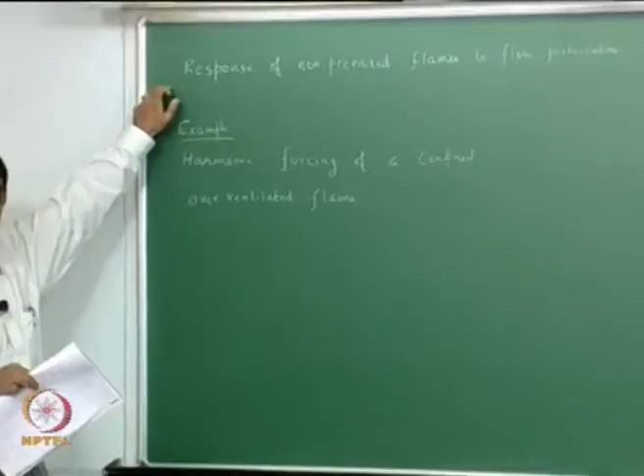Good morning everybody. We will study today the response of non-premix flame to flow perturbations. So we have done some study of how we can calculate the response of premix flames to flow perturbation. And do you remember how we did this?

G equation. So what does G equation do? It tracks the flame front, and then we solve for the flame front. G equation, what is G actually? It is some kind of variable, but it really has meaning only at the flame surface. And now we want to see whether a similar approach can be done for diffusion flames.

So we will specifically follow the approach of Balasubramanian and Sujith, and these references are given here. So first one is 'Nonlinear response of diffusion flames to uniform velocity disturbances', Combustion Science and Technology, 2008, volume 180, page 418 to 436. Then the second one is a paper from Journal of Fluid Mechanics on diffusion flames. There are two more from our colleagues, Chakravarthy's group, and that's also about non-premix flame.

Now compared to premix flame, which has a very large body of literature associated with its response, these are the only papers that you will find about diffusion flames, although nowadays with the reduction of NOx in aero engines, which still uses non-premix flames, instability in diffusion flames is becoming a subject of interest again. There is a textbook available by T.C. Lieuwen called Unsteady Combustor Physics, Cambridge University Press. Chapter 11 of this book has a consolidated treatment based on those papers which I mentioned.

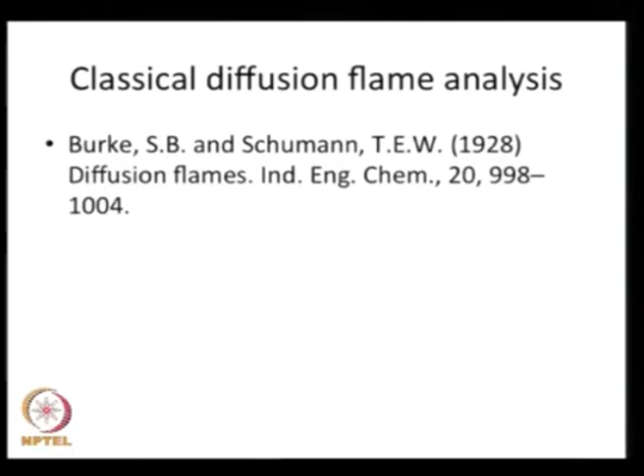Now, this is a very recent textbook. So you must have all heard about classical diffusion flames. This is the pioneering work by Burke and Schumann, which is why these flames are called Burke-Schumann flames. This is in 1928. So we will follow their approach, and now we are specifically interested in looking at the unsteady problem. Burke-Schumann studied the steady problem. Now we are having flow, and the flame can oscillate and wrinkle and so on. So those are the phenomena which are very similar to those you would see in premix flames, but there are some differences. So let us take a look at the geometry.

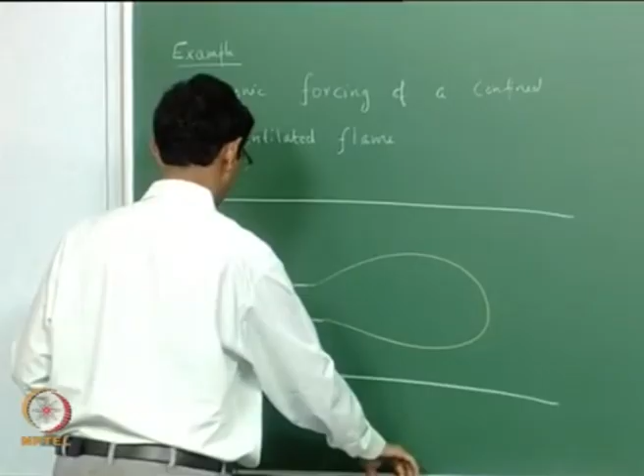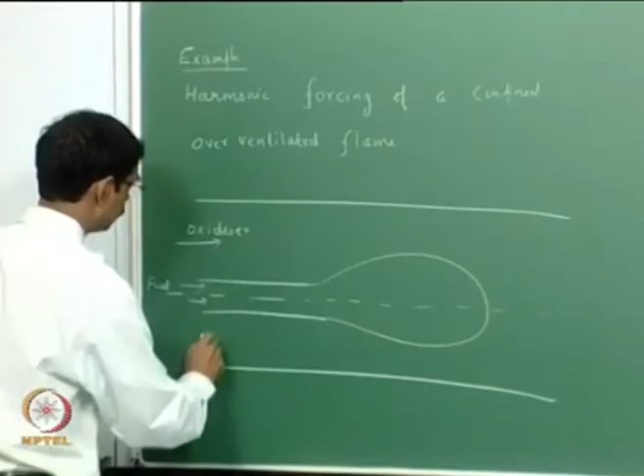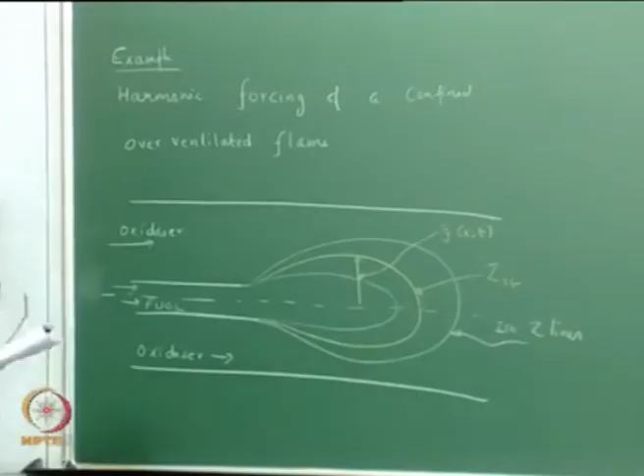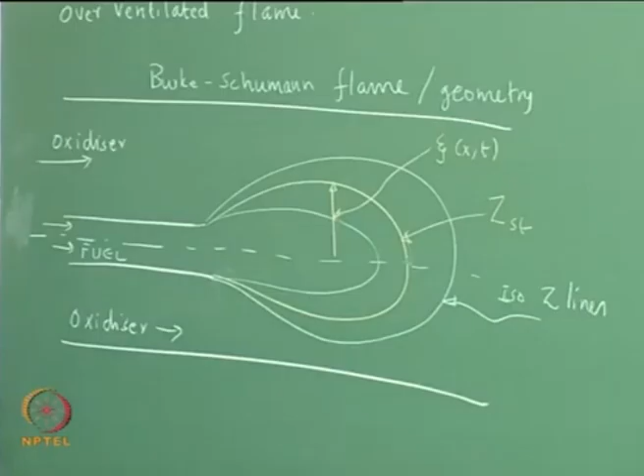This would be an over-ventilated flame, and this is the center line. Fuel. So this would be the classical Burke-Schumann configuration or geometry. So you have fuel coming through a slot, and we are considering 2 dimensional here. You can work out that for axisymmetric also, 2 dimension is simpler, and you have fuel coming inside, oxidizer coming outside.

You can work out for the opposite also, but this is the classical configuration, and there will be a flame here, which is the diffusion flame, and this is usually -- of course you can also have other flame configurations where the flame is coming and attaching on the walls and so on. So this is over ventilated. We can have under ventilated flames also, then it will go on that way.

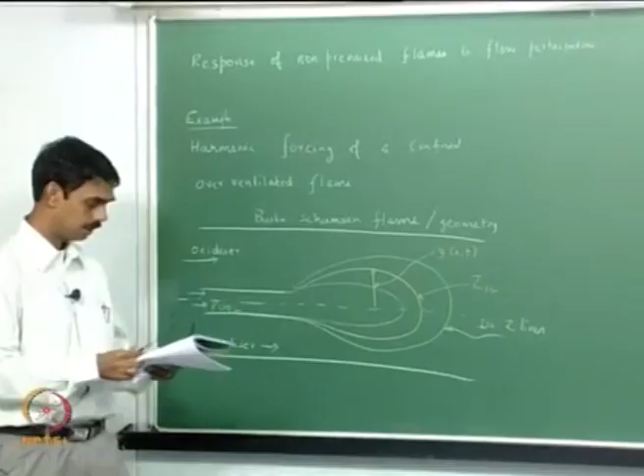So how do you analyze this problem typically? So we do this in the framework of -- what is the formulation we use? Anybody studying combustion here? Shvab-Zeldovich formulation. So what do you get in the end out of Shvab-Zeldovich formulation? Do we know this, or should I do it?

I think I will do it. So let us say we have -- of course we can actually solve both in the case of premix flame and in diffusion flame. We can solve the conservation of species equation, mass, momentum, energy, everything, and we can solve the full flow field, and we can get the reaction rate out of it. But why did we use the G equation approach? Because it was very simple. Okay, so the same way we will try to get a simple partial differential equation which we can solve to get the problem. You can of course do more complicated analysis, but this is the simplest possible way to do it, and where some analytical solutions are possible.

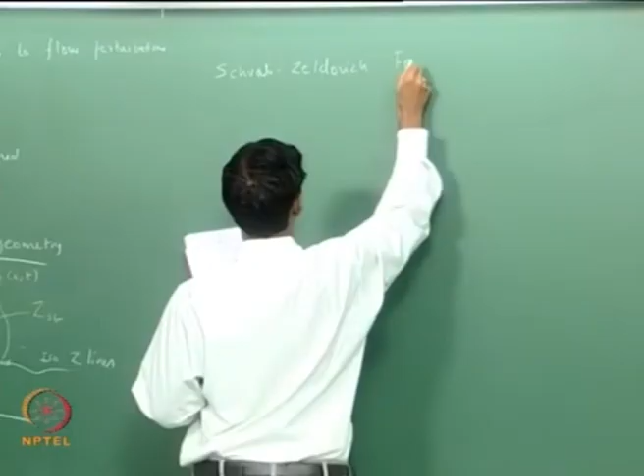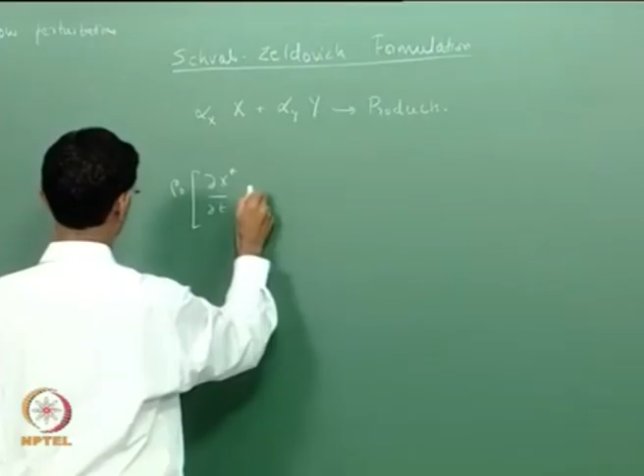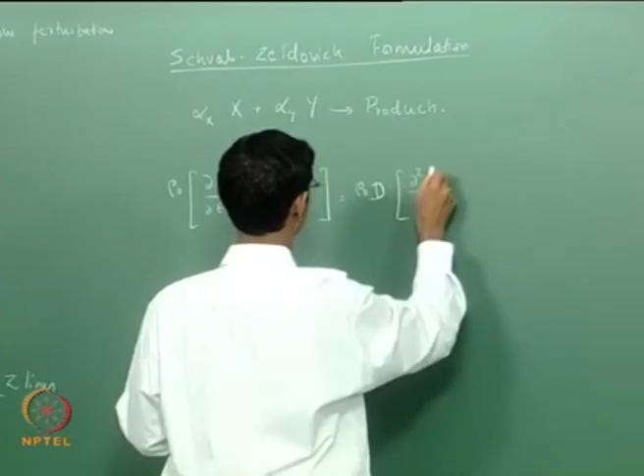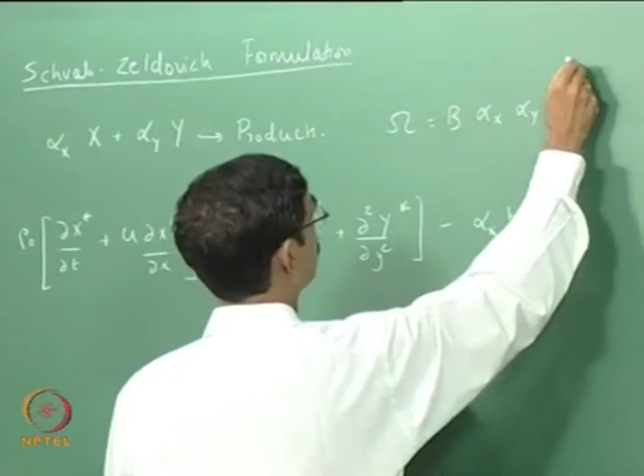So let us say we have some kind of reaction, product. So we will write the species equation for x and y. Star would mean dimensional, and without star will be non-dimensional. D is diffusivity. Omega is the reaction rate, and Wx is the molecular weight of x. Omega can be written as B, alpha_x, alpha_y, e power (-E/RT). So similarly -- if there is any mistake, please point out -- we can write the equation for y also.

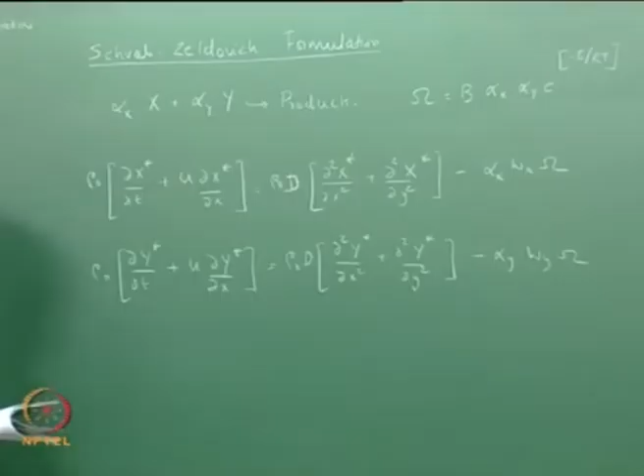So we can see hints of the advection diffusion equation here, which is a very famous equation and solved, but we have some unnecessary term which we cannot handle. So now we have to get rid of it. How do we do this? The way to do it is we should divide this alpha x wx down, and here also alpha y wy, and then you will have omega, and if you subtract, then omega will go away. So that is the key.

So if we can define our new variables, scaled variables, and we define z as x minus y, that there is a difference between the scaled mass fractions. So z is called the Schvab-Zeldovich variable.

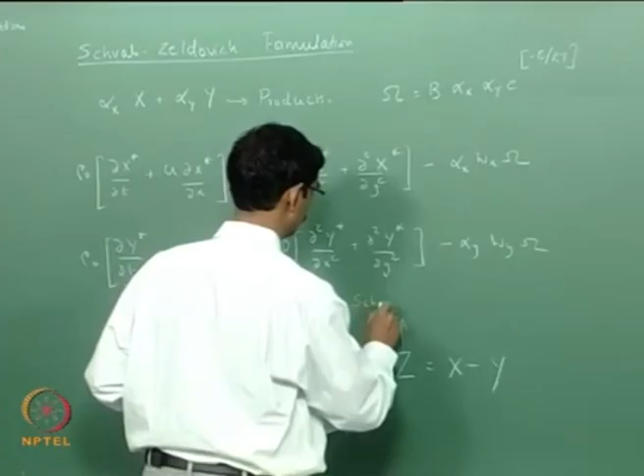So if you redo this, you get... so I subtract this from this, so I will get x minus y is z, and we write the equation in terms of this. Plus, yeah, thank you. So if I have this...

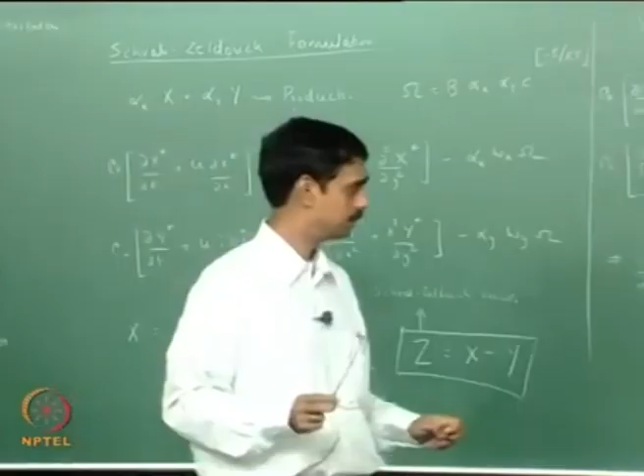So this is the advection diffusion equation. If you compare this equation to the G equation, there we had... so the left hand side of the equations are quite similar, but on the right hand side we have SL times del G over there, but here we actually have a diffusion operator. So that's the difference. So there is some similarity, but there is some difference.

The other similarity is that we are writing it in terms of one variable, but the difference is that Z is a physically meaningful variable everywhere in the field, and you have to solve for it all together, whereas G is just defined as having one sign on one side of the flame, another sign on the other side of the flame, and at G equal to 0 there is a flame. So we can actually say y minus psi is G, and so at G equal to 0, y equals psi, and write equations directly for the flame surface in a premixed flame, right.

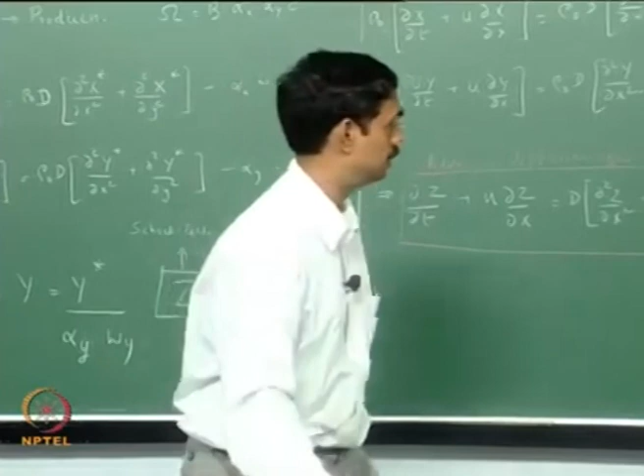That is what we did. So we said that... and then we put this equal to 0 and then directly write an equation for the displacement variable.

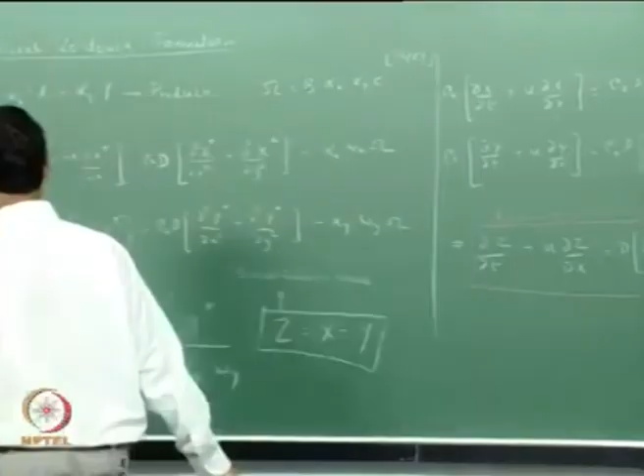So we can't do that here because Z, the Schvab-Zeldovich variable, is a physical variable everywhere and we have to solve for it everywhere, and then we can find the flame surface. How do we find the flame surface? The assumption is that the flame stands at the stoichiometric surface. So we have to find what is the Z stoichiometric, Z corresponding to stoichiometry, which is this scaled x star, so this x minus y corresponding to stoichiometry, and that would be the flame surface. So from that we can get the flame surface and then we can track the flame movement.

I hope this is clear. So there is some strong parallel, but there are also some strong differences between diffusion flames and premixed flames. Even in the results, in terms of the transfer function, we will see some strong parallels and some differences. Now we will proceed to solve for it.

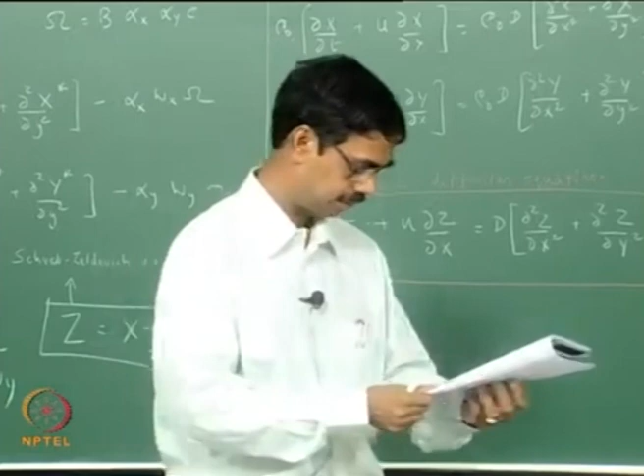So we need to apply boundary conditions, without which we cannot solve any problem. Let us examine what are the boundary conditions here. So at the inlet there is fuel, there is oxidizer. In reality, the oxidizer can diffuse and the products can actually diffuse into the fuel stream. Similarly, fuel can diffuse into the oxidizer.

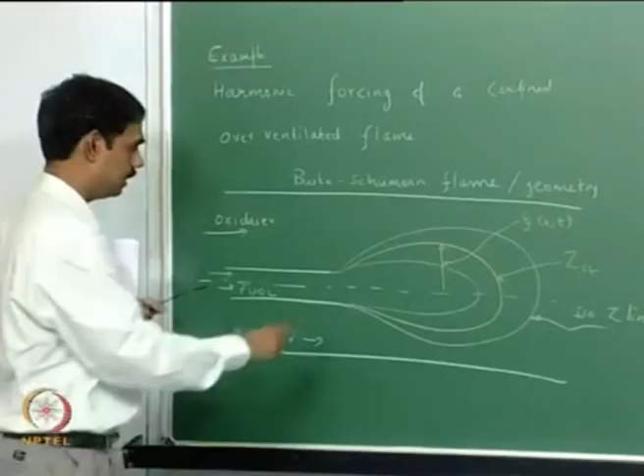So we will ignore those effects and we say that at the inlet plane, in this location we have fuel, so we will have no oxidizer, and in this location we have only oxidizer at the inlet plane. That is the way we are going to enforce the boundary conditions.

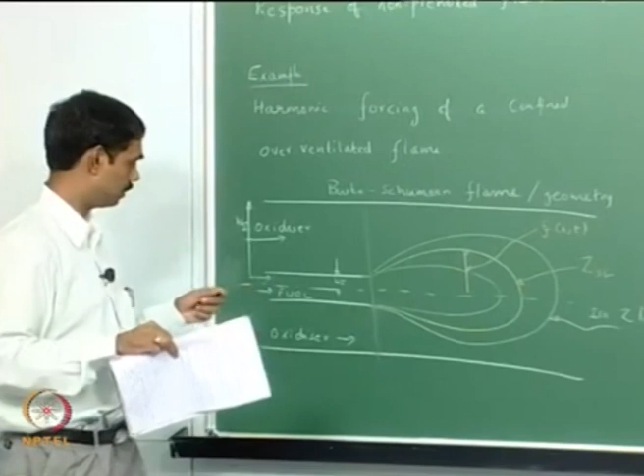Just need one more notation. I am following the symbols from the textbook by Tim Lieuwen on combustion dynamics. So this half width is W1, and this half width of the outer tube is W2.

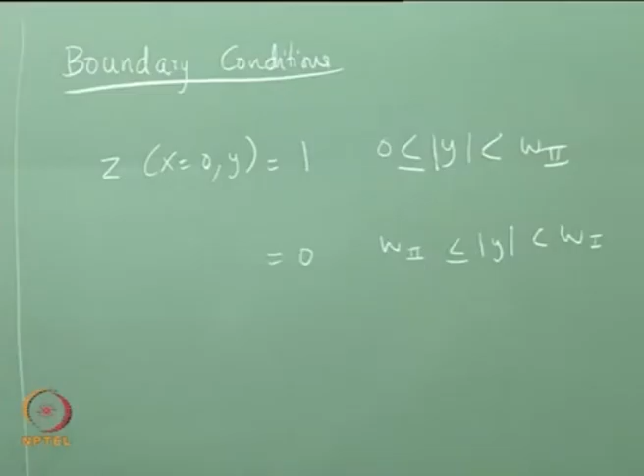So this basically means that in the oxidizer tube we have oxidizer, and in the fuel tube we have fuel, that is all. And enforcing this boundary condition also enables us to obtain an analytical solution, as opposed to if you enforce the flux boundary condition, where you would have difficulty getting an analytical solution.

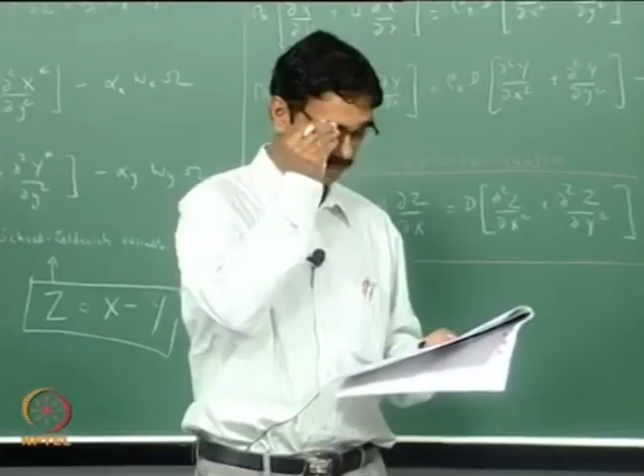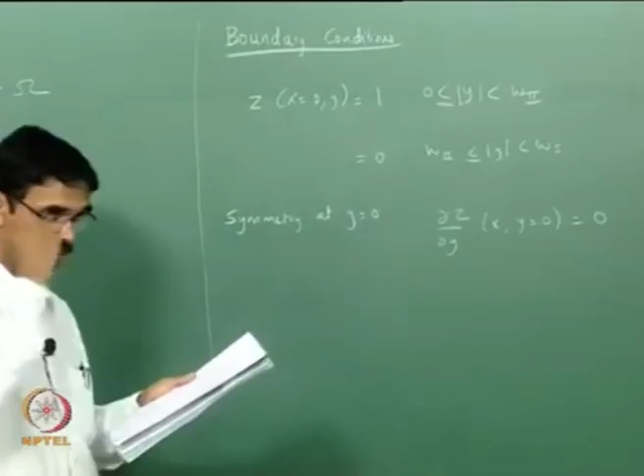So in reality there is axial diffusion of fuel into the oxidizer and vice versa, axial diffusion of oxidizer into the fuel. So the solution must be obtained over a larger domain that includes the supply lines of fuel and oxidizer. Let us correct the figure, let us call this bigger outer tube W1 and this is W2. So this boundary condition implicitly neglects the axial diffusion at x equal to 0, and we can assume symmetry boundary condition at the centerline, right, and no diffusion should happen through the walls because you have a rigid wall.

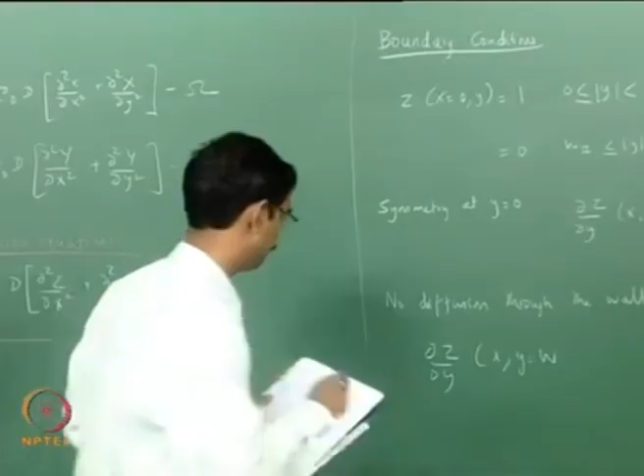And as x tends to infinity, Z must attain a finite value finally.

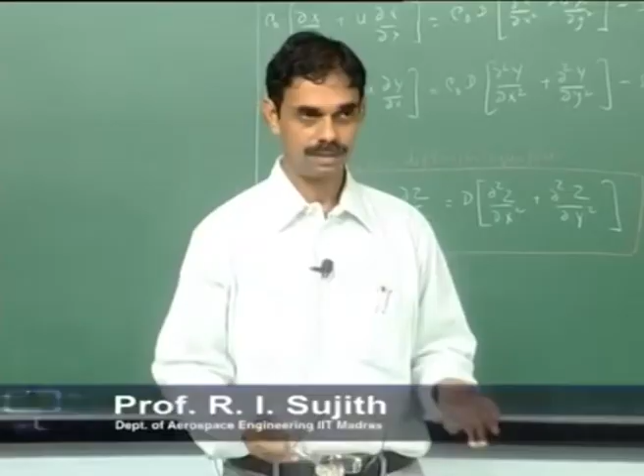We will derive a solution in the limit of small perturbations, that is, we expand everything as some zeroth order plus first order, or a base flow plus perturbation, and then we can get the solution. In fact, you do not need to do this because our equation is linear, provided u is an input, and you can see it is a linear equation. So we do not need to do it, but it is very convenient and will enable us to work out an analytical solution. So we will do that.

So any parameter, I am following Lieuwen's notation, which is a function of x and t, can be written as some base flow plus perturbation.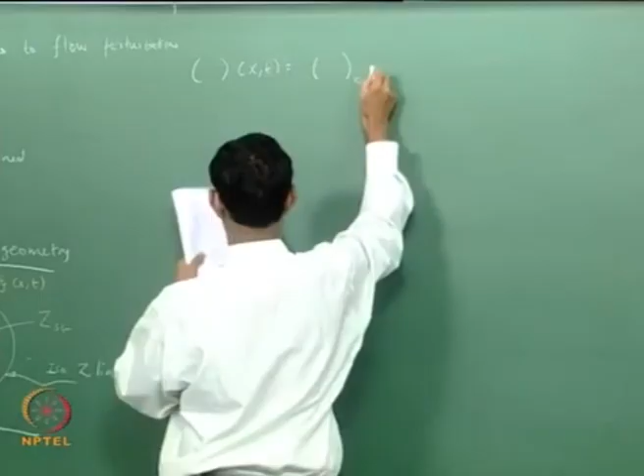With this approach we will be able to derive an explicit analytical expression for the flame surface, and this will be very nice in looking at the controlling features of the flame dynamics. So first we will study the problem in the absence of forcing, so that we can get the steady solution, and then we will look at the problem with forcing.

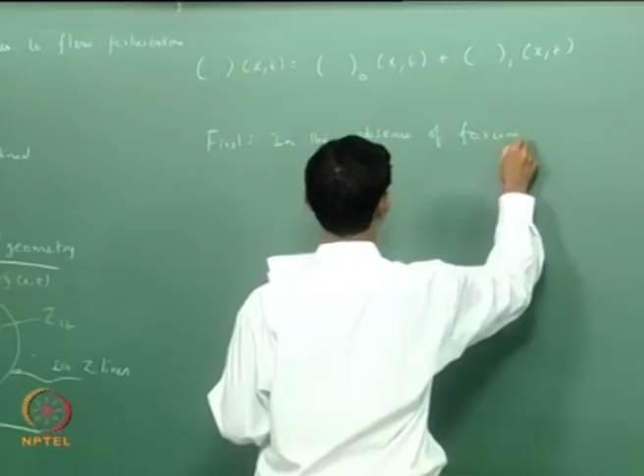So in our previous notation this would be Z bar and U bar, but I am just following the Lieuwen book here, so that you can follow it also.

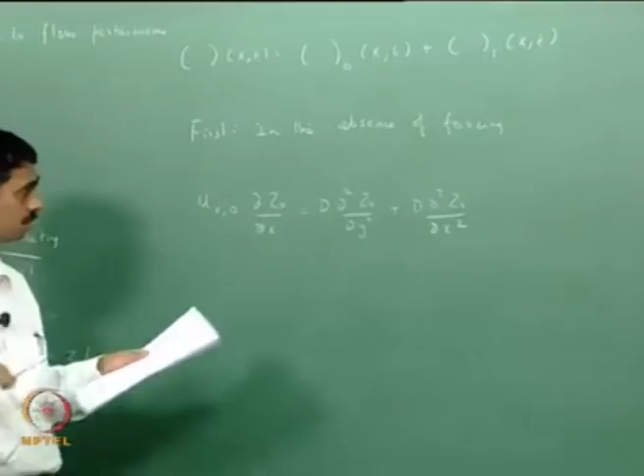So this can be solved with separation of variables. I can work it out next class, but I just want to write the solution here.

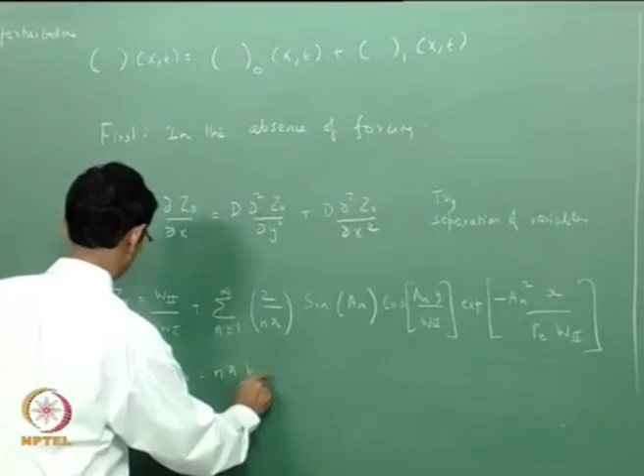So just try if you would get this. Actually, you should get some more complicated expression here, but then if you take Peclet number tending to very large, then it should reduce to this expression. So I will just let you work this out, bring it next class, and then we will see what you got and what I have.

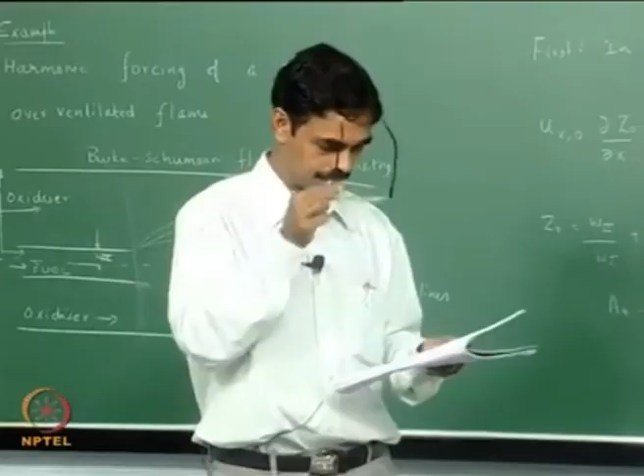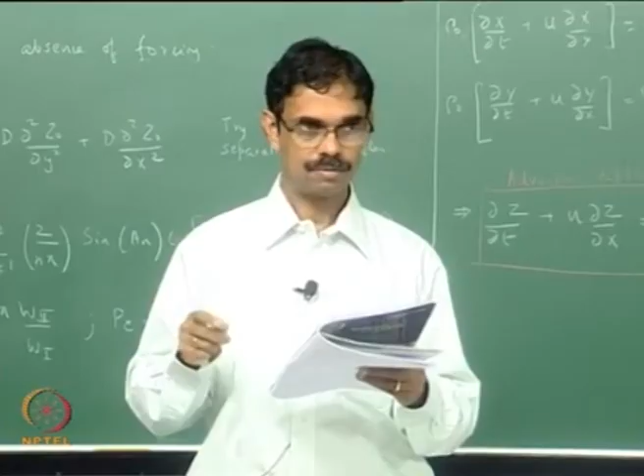Now this quantity, Peclet number, maybe in this class we are introducing for the first time, so it needs some explanation. Peclet number physically corresponds to, of course all numbers correspond to ratio of time scales or length scales or something like that. Here it corresponds to the relative time scale, ratio of the relative time scales for the two phenomena, convection and diffusion. So we want to transport mass over a distance W2, that is this, and what are the time scales involved.

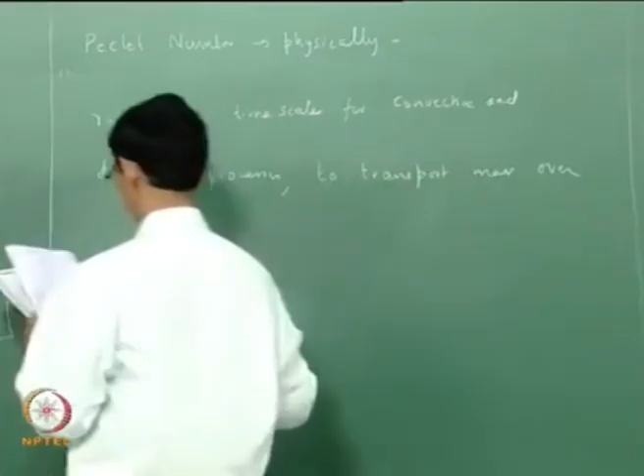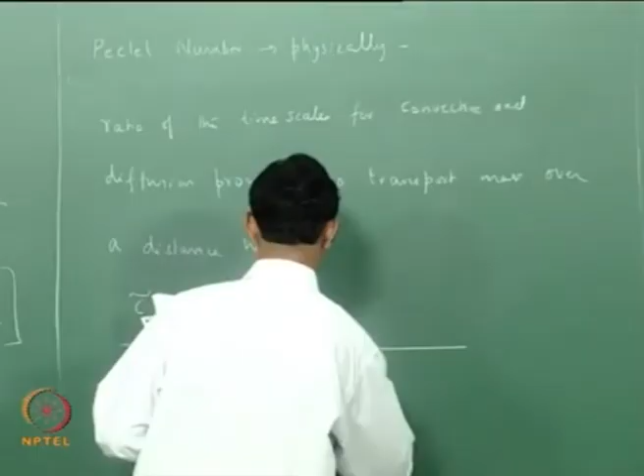So basically we want tau diffusion divided by tau convection. Tau convection is pretty straightforward, the distance divided by the velocity. Now what is tau diffusion?

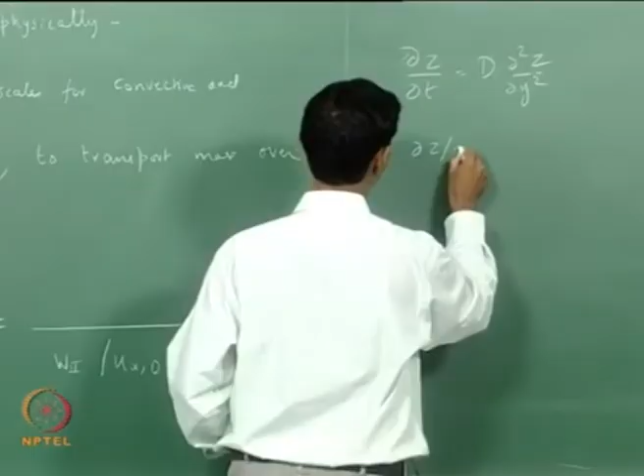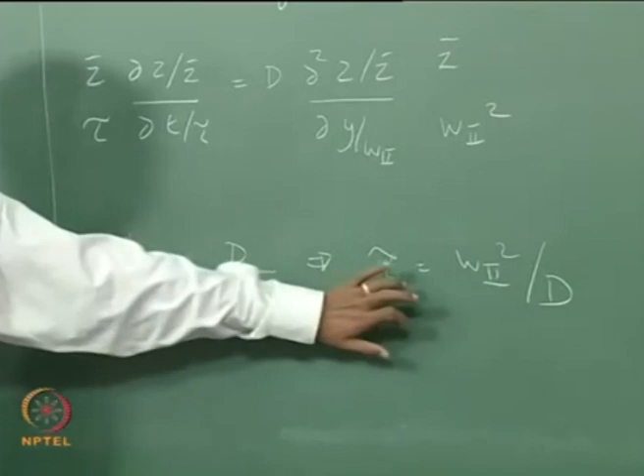So let us do a little analysis. So this is the heat equation. So if you get the length scales, so this is length squared over diffusion, that is the diffusive time scale.

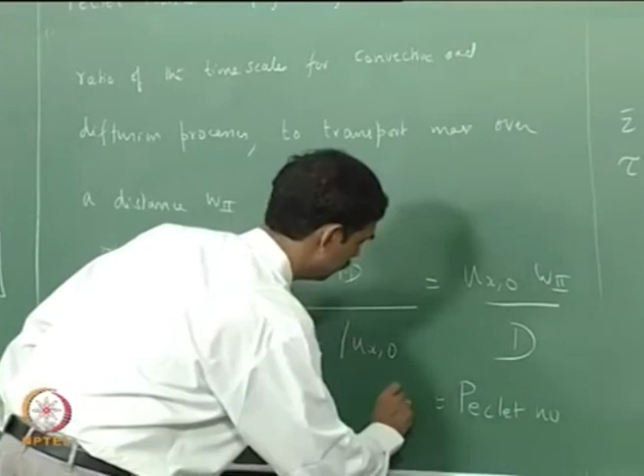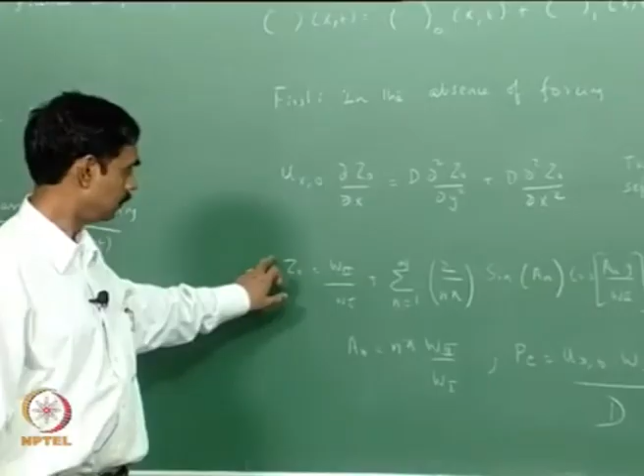So how do you, having got an expression for Z0, the Shvab-Zeldovich variable, determine where the flame sheet is? What is the assumption in Burke-Schumann? The flame is like a sheet. The inherent assumption in Burke-Schumann flame is that you have infinite reaction rate compared to the other processes. Reaction rate is much faster compared to convection and diffusion. So the flame is really a thin sheet, and this happens.

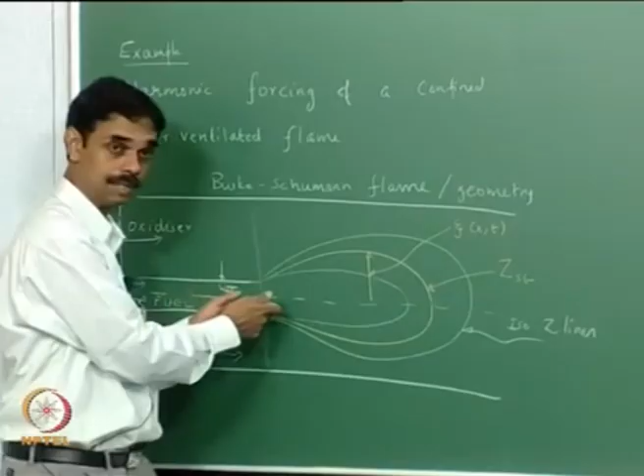So you solve for the Z field, and wherever you have the stoichiometric contour, you have fuel diffusing out, oxidizer diffusing in. So there is a field of YF and a field of YO, a fuel mass fraction contours, oxidizer mass fraction contours. So somewhere, if you look inside, you will have more fuel compared to oxidizer, because naturally fuel is coming out. If I look somewhere here, there will be more oxidizer than fuel, because fuel is diffusing out, but predominantly it is oxidizer. But somewhere down in between, the concentration of both fuel and air will be that of stoichiometric mixture, and the flame stands there.

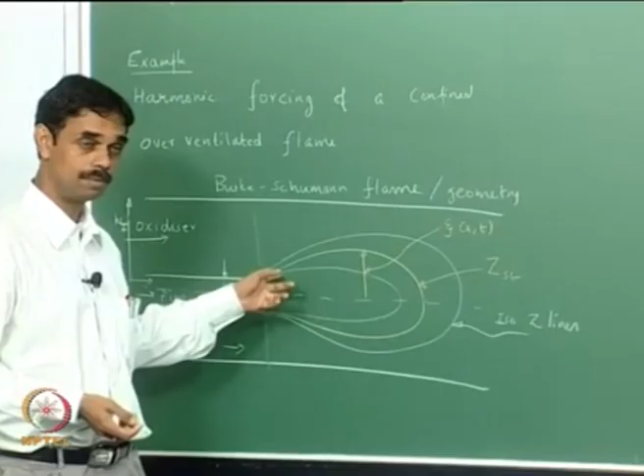So this is the flame sheet assumption. We use that to locate the position of the flame. This is an assumption. In a real non-premixed flame, for example, you will have other phenomena such as triple flame, flame standoff, and so on, because the walls may quench, so reaction may not happen here. There may be a little bit of premixed mixture here, and so on. So there are those complicated finite rate chemistry effects that happen, but here we do not have any of that, because we are referring to classical Burke-Schumann.

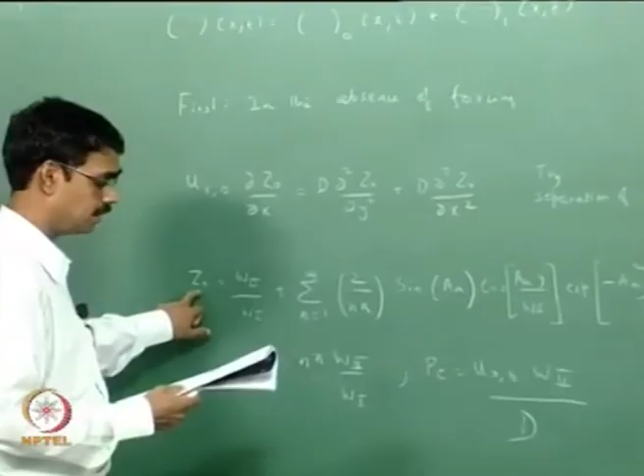So all we have to do is take this and put Z0 as ZST, and this would be the flame position, okay, and it will be an implicit expression. So you will have to solve it backwards, or iteratively, or something.

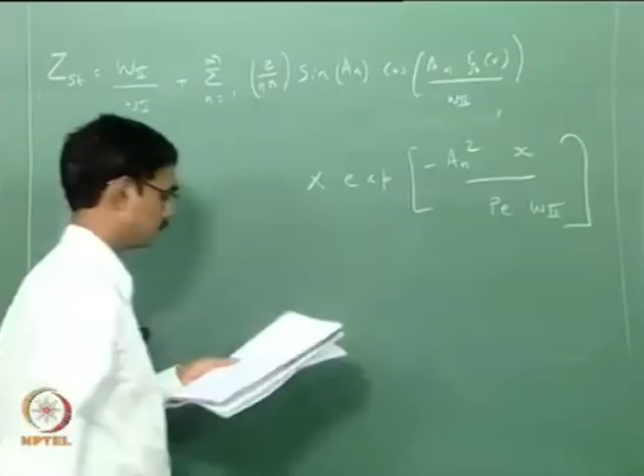I'll work out the full solution next class, but it's there in the notes. Just try this out. You can take that equation and use separation of variables. If it doesn't work out, I will do it next class.

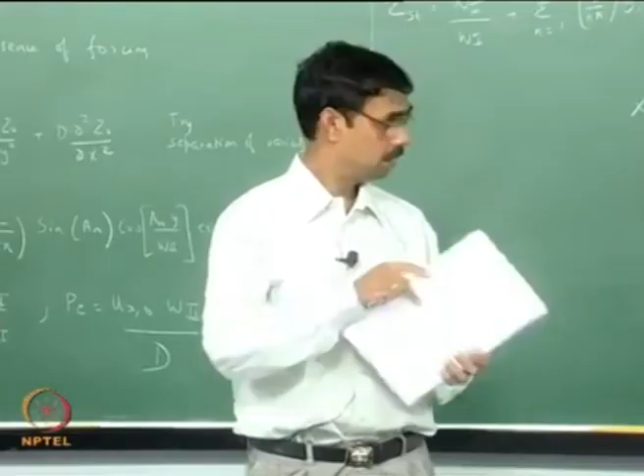Now one remark I want to make is, suppose you are solving in a circular geometry, can you imagine how these expressions would look like? They would be in terms of Bessel functions. So that's the difference. Here it will be in sines and cosines because we are in a 2D geometry.

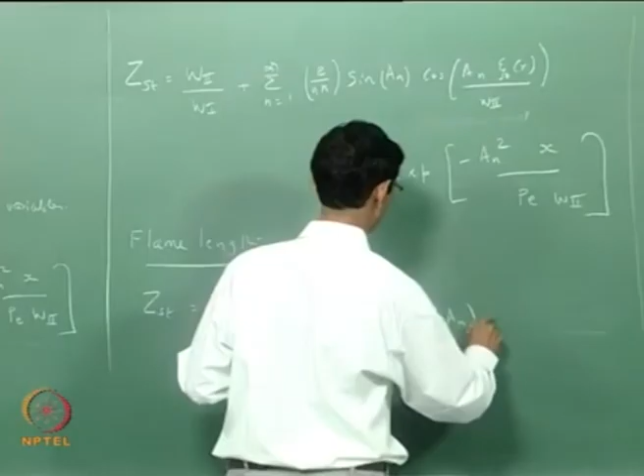So next we want to get the flame length. We just have to put this term as 1, so that way you will get the maximum position, and that is the flame length.

So in the thermoacoustic problem, this duct will be long and there will be an acoustic field, and there will be a certain velocity fluctuation here which will affect the mixing, governed by the advection diffusion equation. That would result in the flame fluctuating, and the heat release rate fluctuating. Now that will drive the acoustic field, which in turn will give the feedback.

So now we are not studying that problem here, I am not working it out in the class, but one of the references in that list talked about that.

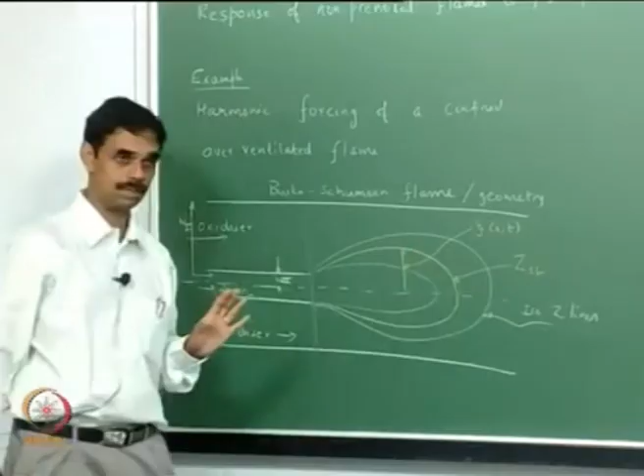But here what I am going to do is impose a velocity fluctuation and see what happens to the flame. Will the flame dance, will it wrinkle, will it move up and down, that kind of thing.

So what we have is a base flow field, that is, even if there was no fluctuation, you will have fuel and oxidizer and they will diffuse out and there will be a flame.

Now perturb it with certain velocity fluctuations. How can you do velocity fluctuations? You say u is mean plus u prime, and u prime goes like some sin omega t, or in an experiment you can put a valve and fluctuate the flow rate, and then see what happens to the equation.

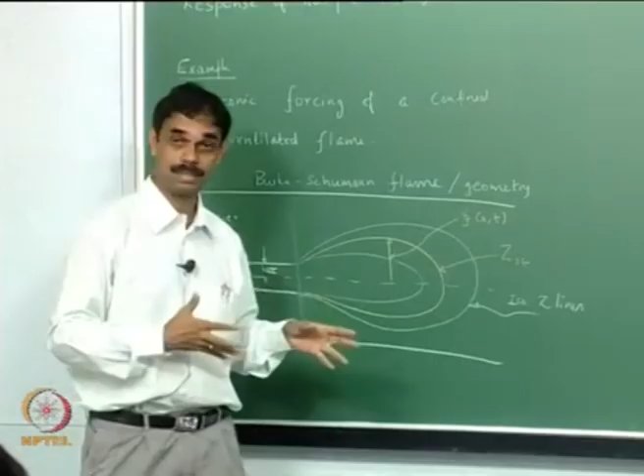Our advection diffusion equation is an unsteady equation. We drop the unsteady term to get the base flow, but now you have to put the term back in and solve for it.

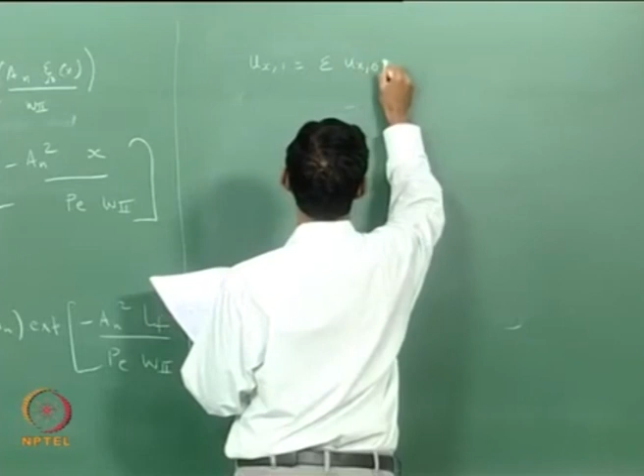So what we need to do is, ux naught was the base flow in this convention, ux1 is the perturbation, and I just follow the convention in this textbook of Lieuwen.

So if you split it as z naught plus z prime, what you will get is a mean plus time fluctuation here plus mean plus time fluctuation there. That's why the two terms.

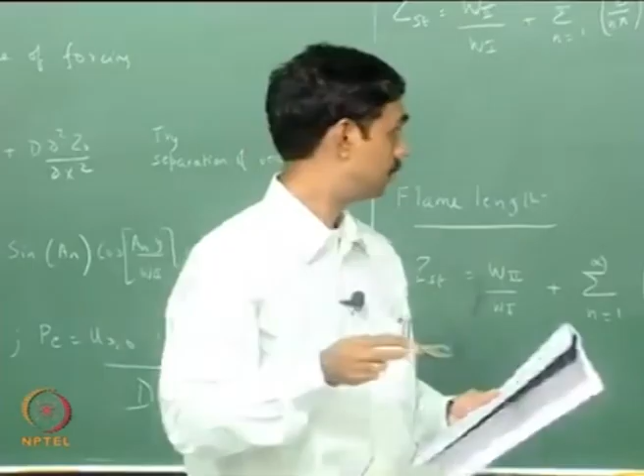Epsilon is like, how much, so the total U equal to ux comma... so this is the total velocity field. So epsilon is like the amplitude of the perturbations as a fraction of the mean velocity.

Clear? So again we can try to solve this, it will be an interesting exercise. If you don't get it, that's completely fine, I will solve it in class, but just try it, I think it's kind of interesting.

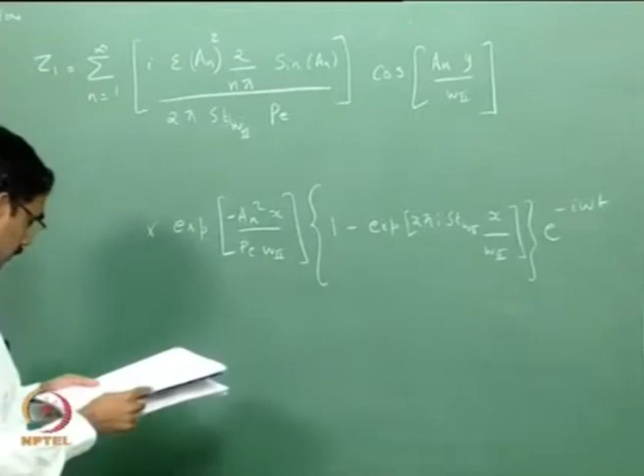No, f is, I mean omega is 2 pi f.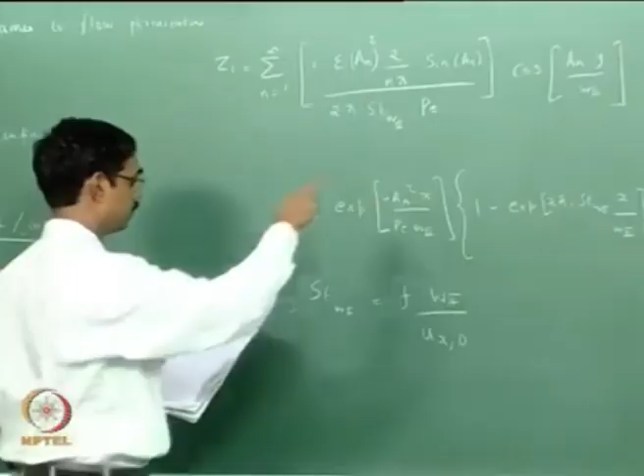We can simplify the expression, because if you take a look at the expression for z naught and if you differentiate it, you will get this scaling term sitting in front. We had the formula for z naught in your book.

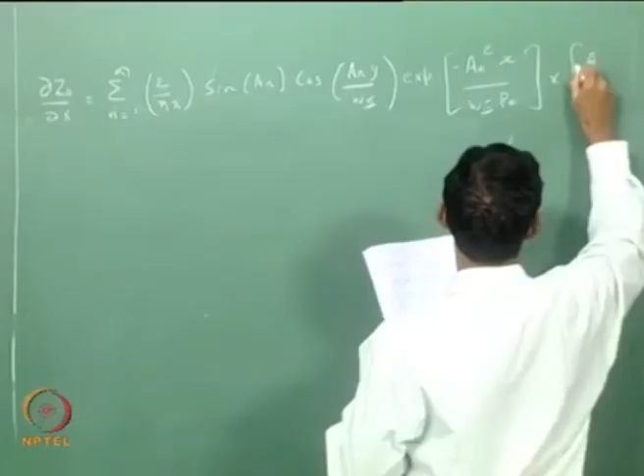So if you use this, these terms are... so you can write without the sigma as z1 equal to...

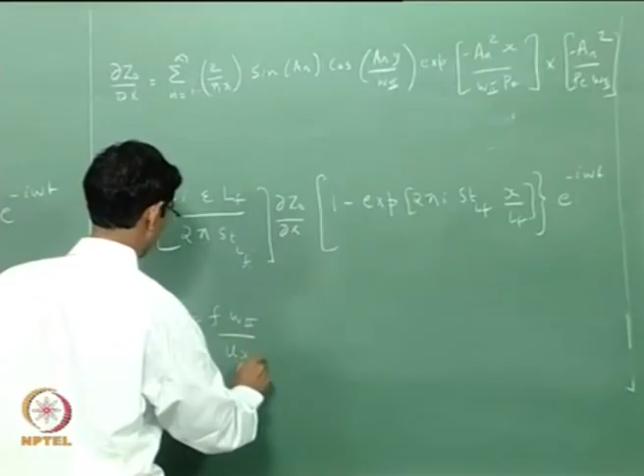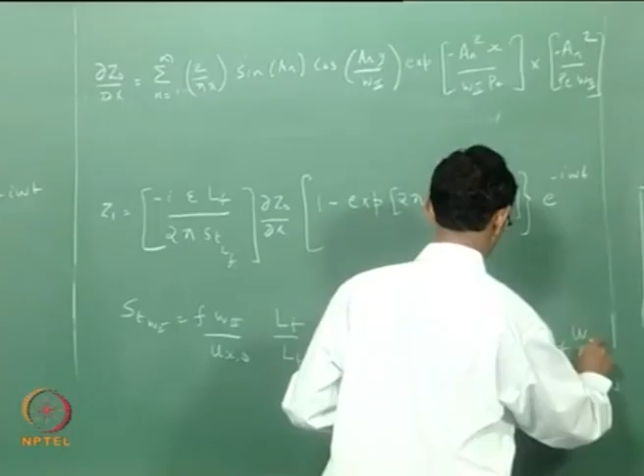So this we have used in here, and you get this expression. So please check on this.

So this is the expression for the perturbed Z field. So you have the base flow plus the perturbed Z field. Now we have solved for the entire thing, although that is not what we are looking for. We just want the final what happens to the flame, but there is no option but to solve for this.

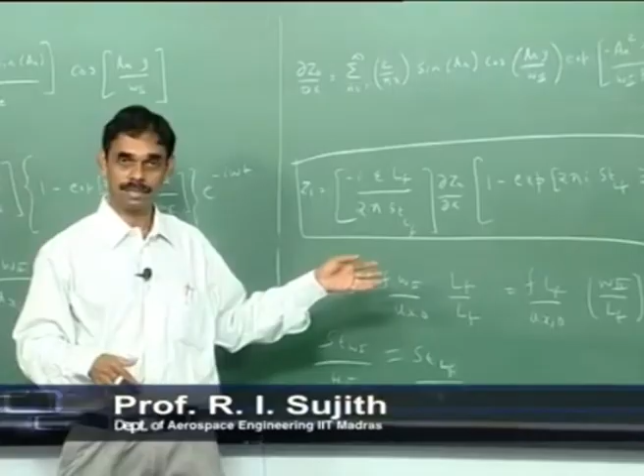Now from this we want to look at what happens to the flame and how it oscillates. We will do that next class, and we will also look at the derivation of these things in case you are having difficulty. So stop here now.